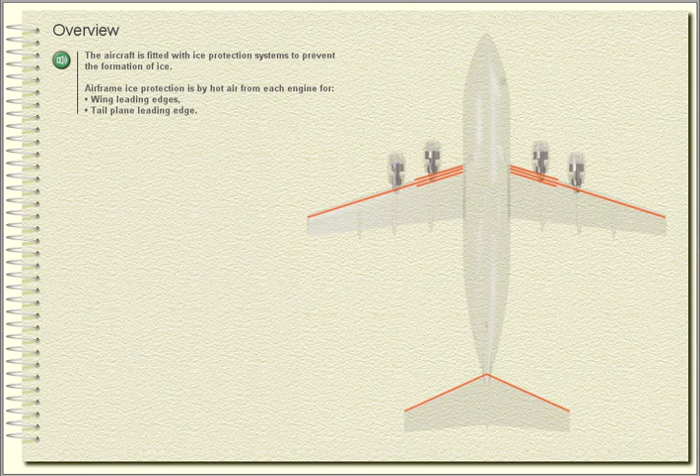Other ice protection is by electrical heating for pitot heads, front static vent plates, Q-feel pitot head, windscreens A and B, and TAT probes.

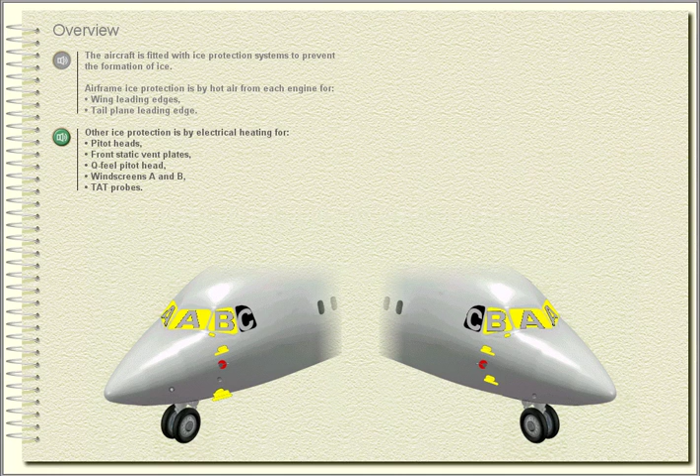Each A windscreen is provided with a 2-speed wiper and a manually operated screen wash.

An ice detector is fitted to warn the crew of ice accretion.

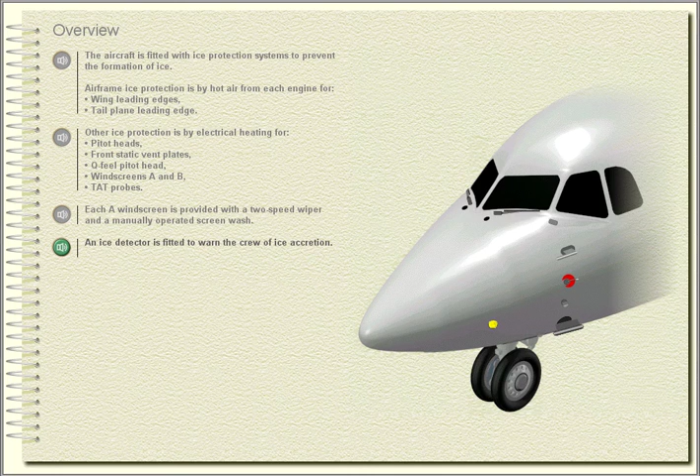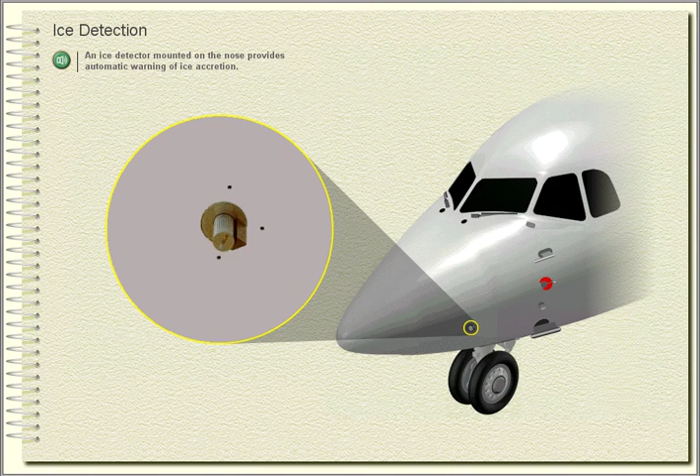Ice detection. An ice detector mounted on the nose provides automatic warning of ice accretion. The ice detector is controlled by the ice detector switch on the ice protection panel.

The switch is normally on and is covered to prevent it being selected off accidentally.

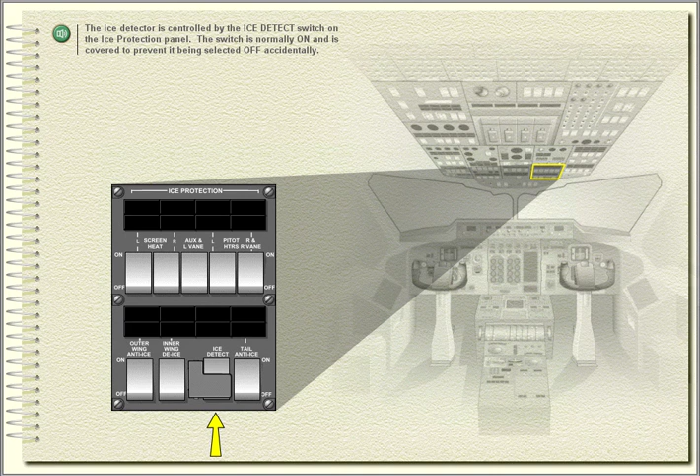The ice detector comprises an AC motor driving a serrated rotor next to a fixed knife-edge cutter.

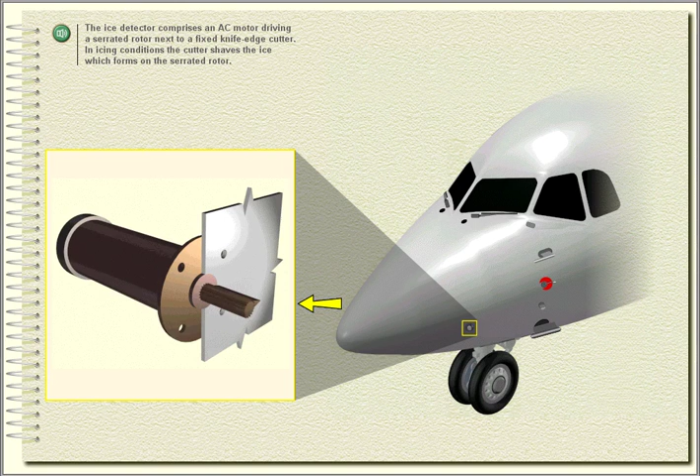In icing conditions, the cutter shaves the ice which forms on the serrated rotor. This action produces a torque reaction in the motor, which illuminates 'Ice detected' on the central warning panel.

The annunciator will remain lit for 60 seconds, or until the aircraft is out of icing conditions.

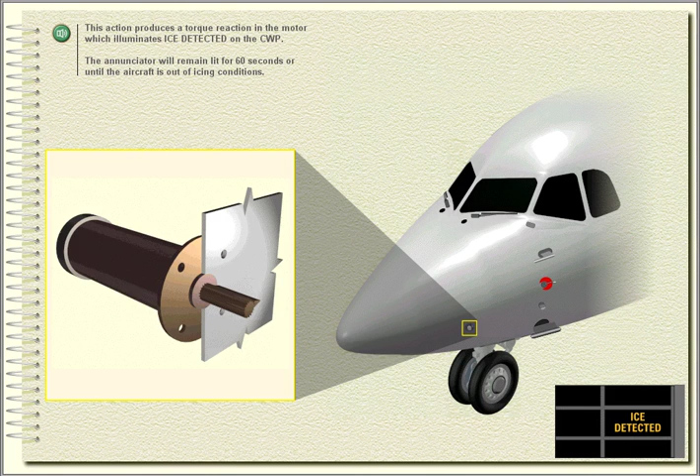Wing ice protection. Wing ice protection is provided by two separate systems: outer wing anti-icing and inner wing de-icing. The complete wing leading edge is anti-iced by hot air, normally supplied from the outer engines 1 and 4.

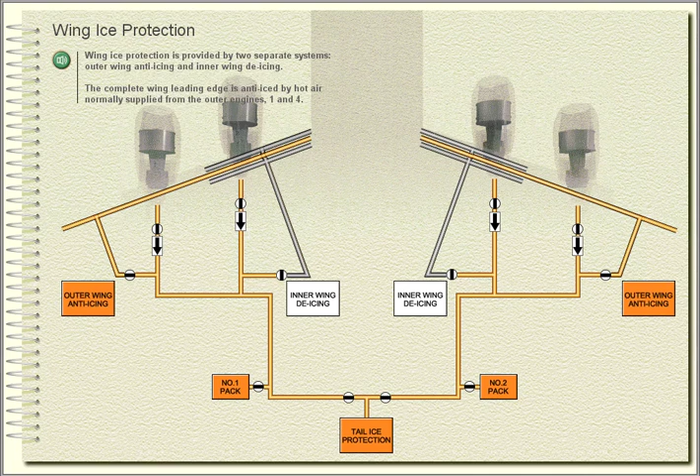Additional ice protection is provided for the inner section of the wing only, which is de-iced by hot air, normally supplied from the inner engines 2 and 3.

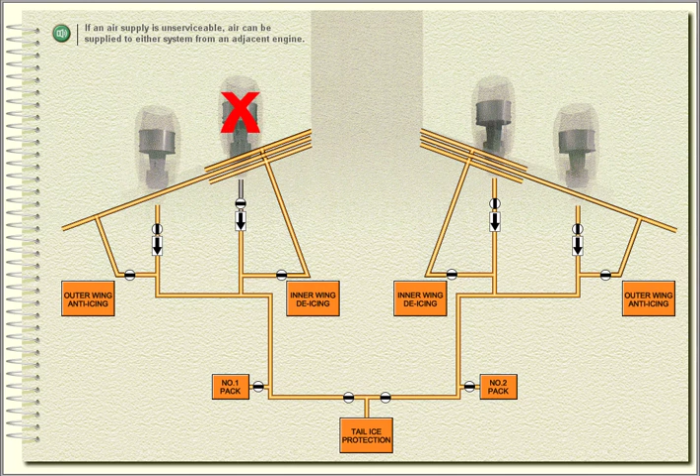If an air supply is unserviceable, air can be supplied to either system from an adjacent engine. Exhaust air is ducted overboard through under-wing vents or at the wingtips across the aileron horn.

Outer wing anti-icing is used whenever ice forms on the airframe to keep the leading edge clear of ice. Inner wing de-icing is used during holding and approach in icing conditions to remove built-up ice from the inner section of the wing.

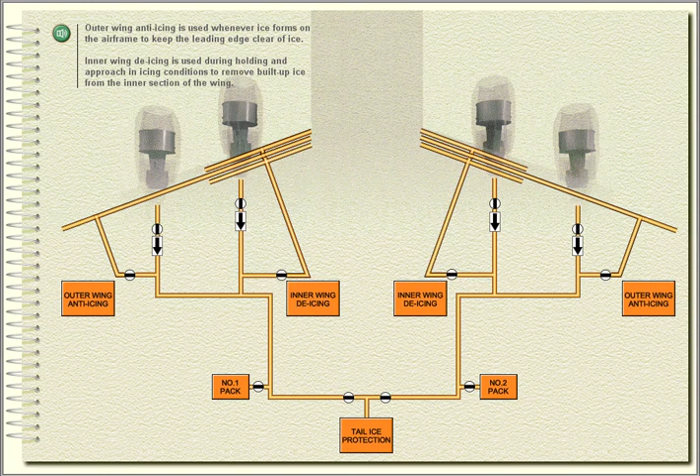Each system has a control switch on the ice protection panel, each one controlling a pair of valves. The valves can only be opened in flight, and each has a not in position selected annunciator.

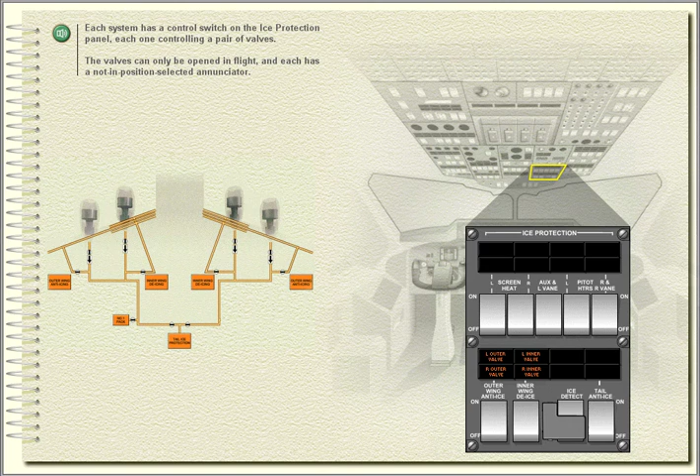Operation of either outer wing anti-icing or inner wing de-icing is confirmed by wing tail anti-ice on.

If an approach is made in icing conditions, inner wing de-icing is used to ensure removal of all ice from the inner wing. If it is not,

wing not de-iced illuminates when flaps are selected to remind the crew that insufficient ice protection is being used.

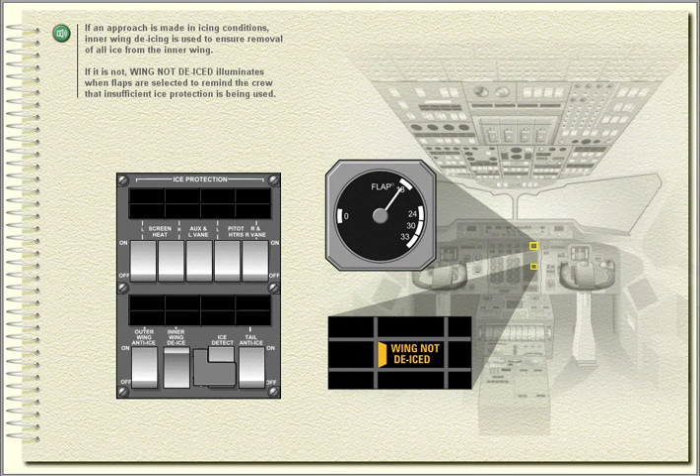If the temperature of an engine air supply is low when outer wing anti-ice or inner wing de-ice are in use, air low temp illuminates. Engine air fault also illuminates to identify which engine air supply is affected.

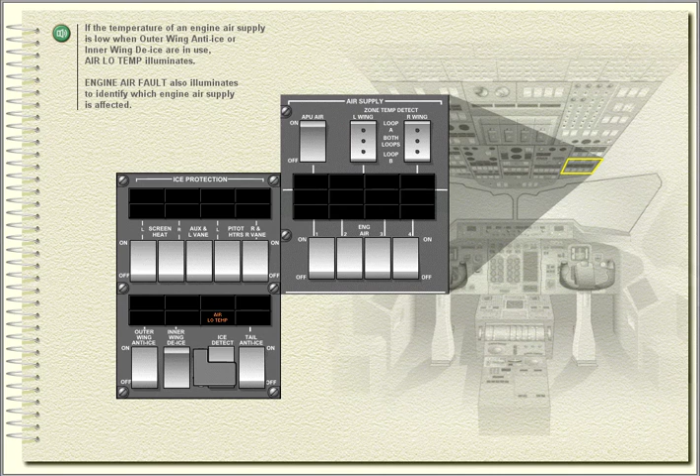Engine air fault will not illuminate if the engine air valve is selected off.

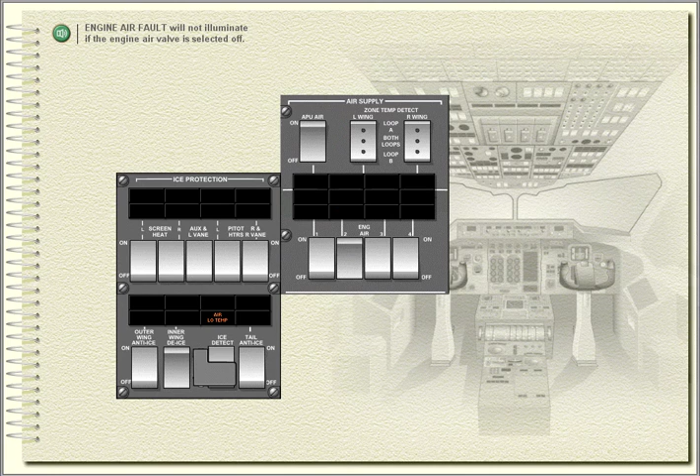Tail ice protection. The leading edge of the tailplane is anti-iced by hot air from the two bleed air ducts at the rear of the spine.

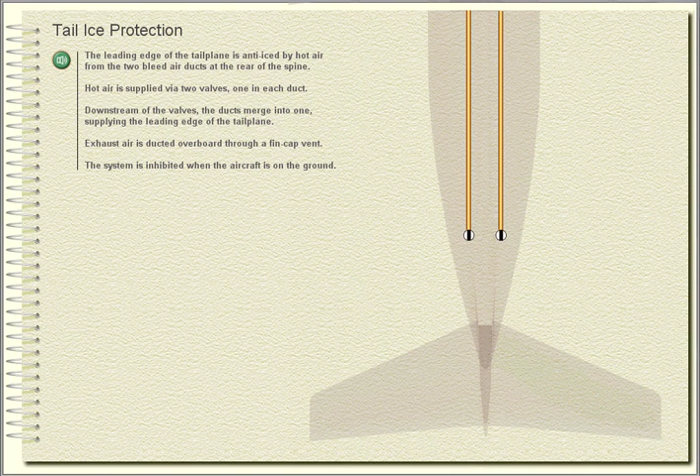Hot air is supplied via two valves, one in each duct. Downstream of the valves, the ducts merge into one, supplying the leading edge of the tailplane.

Exhaust air is ducted overboard through a fin cap vent.

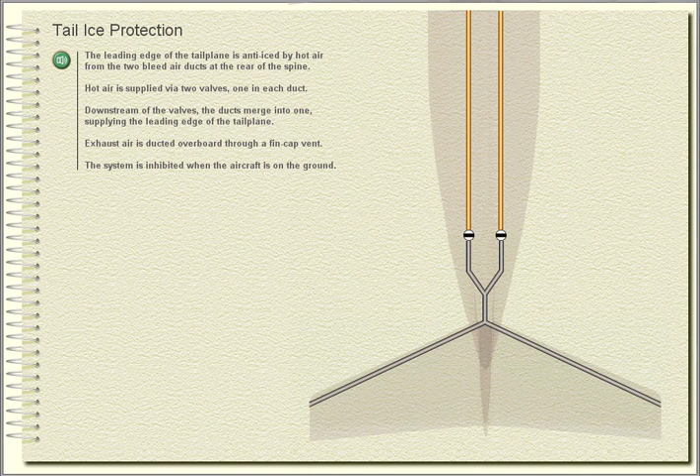The system is inhibited when the aircraft is on the ground. A tail anti-ice switch controls both valves, and each has a not in position selected annunciator.

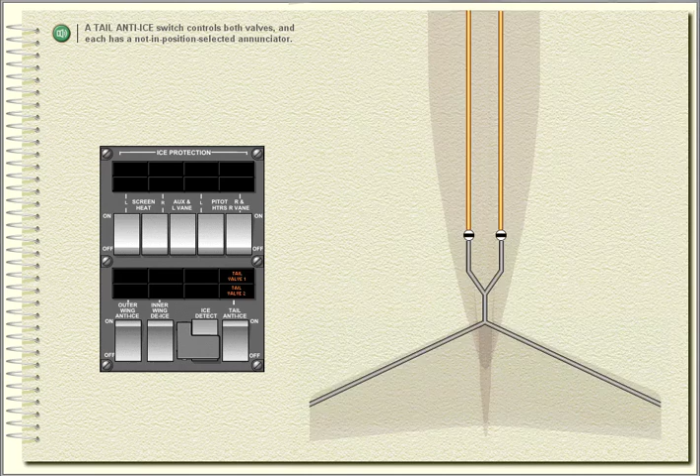Operation of tail anti-icing is confirmed by wing tail anti-ice on. This annunciator confirms the operation of any of the three airframe ice protection systems.

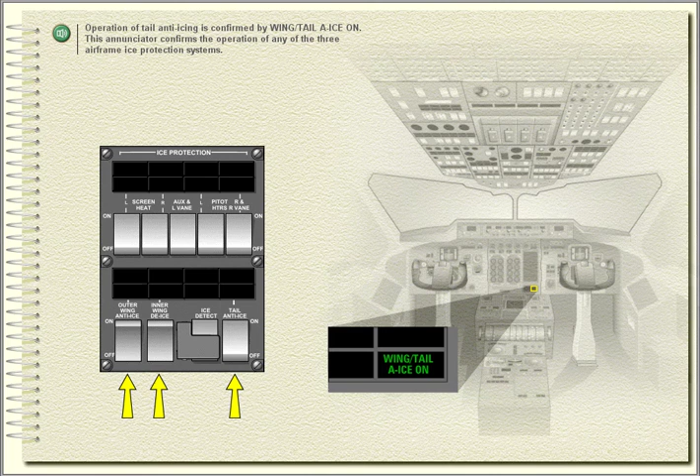Pitot and static heaters. The pitot heads, static plates, TAT probes and airflow sensor vanes are fitted with electrically heated elements to prevent ice formation.

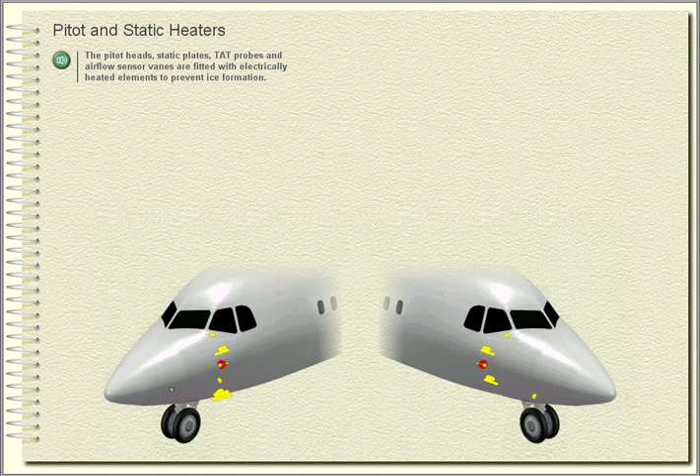There are three pitot heads mounted on the forward fuselage. The captain's on the left-hand side, the first officer's on the right-hand side. An auxiliary pitot head is fitted on the right-hand side just below the first officer's.

A Q-pot pitot static head supplies the control feel system and is mounted on the underside of the forward fuselage.

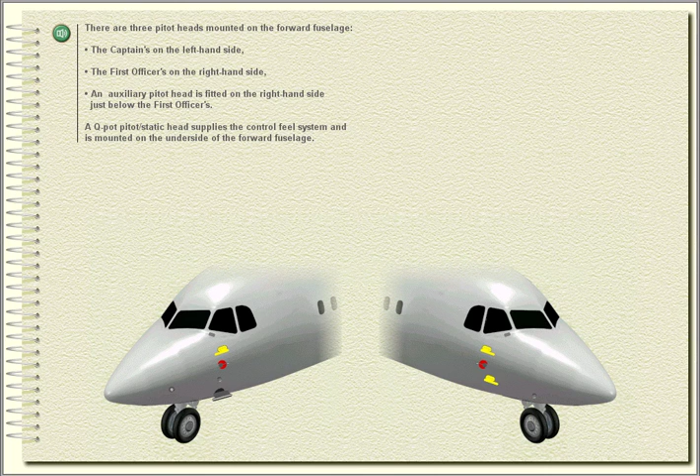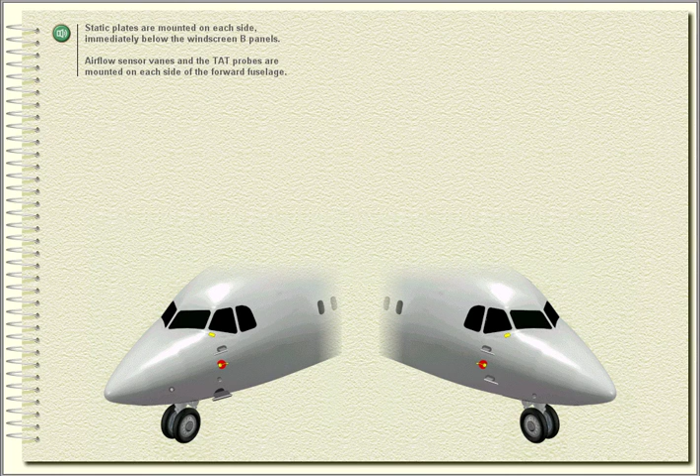Static plates are mounted on each side, immediately below the windscreen B panels. Airflow sensor vanes and the TAT probes are mounted on each side of the forward fuselage.

Three switches, labelled left pitot heaters, right pitot heaters and right vane, and auxiliary and left vane, control power to the pitot heaters and airflow sensor vane heaters.

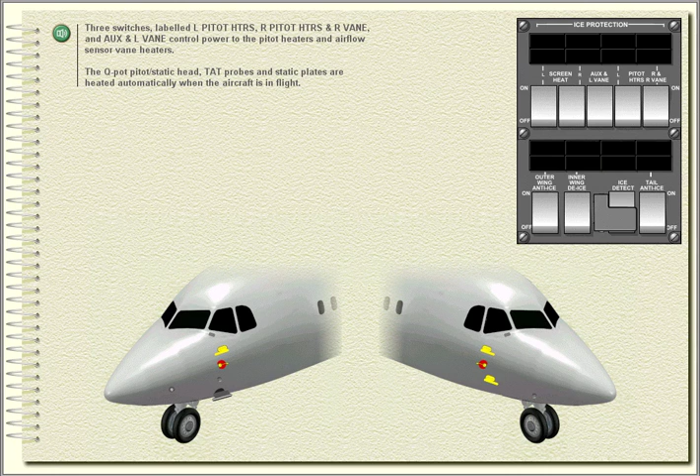The Q-pot pitot static head, TAT probes and static plates are heated automatically when the aircraft is in flight.

Failure of any pitot heater, airflow sensor vane heater or the Q-pot pitot static heater is indicated on the ice protection panel. There is no failure indication for a static plate or TAT probe heater.

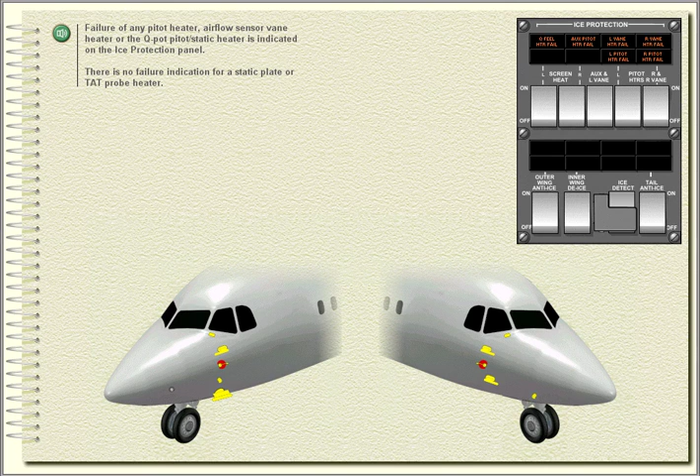Windscreen heating. The A and B windscreen panels are electrically heated to prevent the formation of ice and mist on them, and to improve their resistance to bird strike.

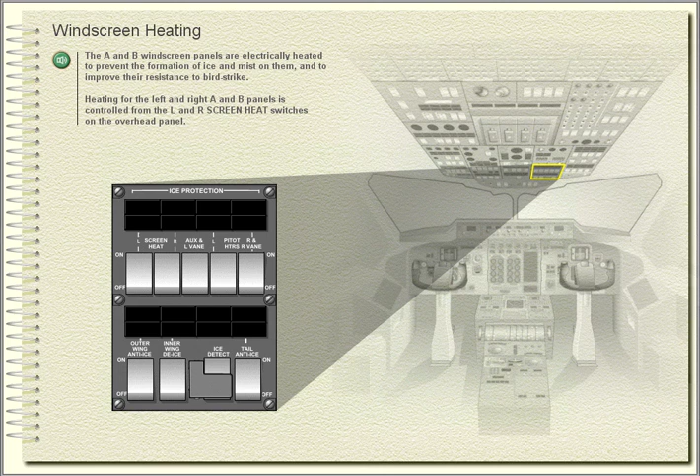Heating for the left and right A and B panels is controlled from the left and right screen heat switches on the overhead panel.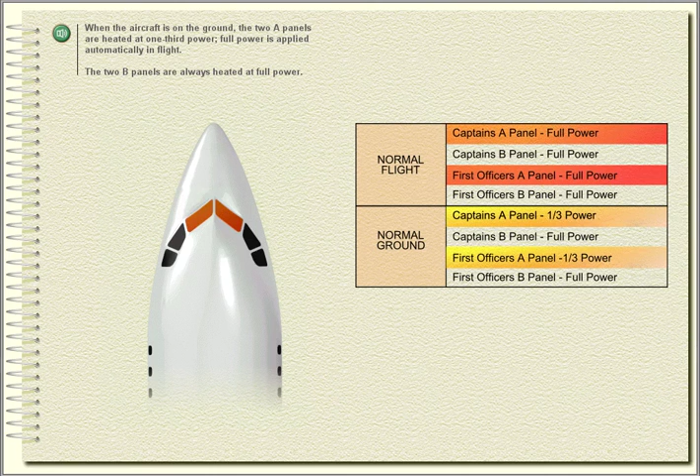When the aircraft is on the ground, the two A panels are heated at 1/3 power. Full power is applied automatically in flight. The two B panels are always heated at full power.

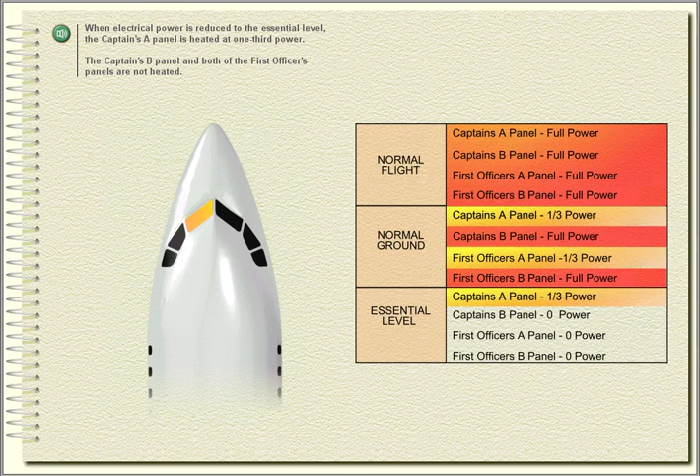When electrical power is reduced to the essential level, the captain's A panel is heated at 1/3 power. The captain's B panel and both of the first officer's panels are not heated.

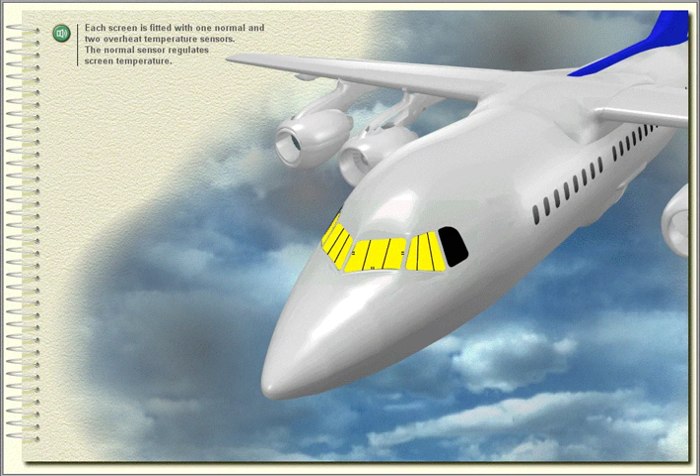Each screen is fitted with one normal and two overheat temperature sensors. The normal sensor regulates screen temperature. If the normal sensor fails, screen temperature rises.

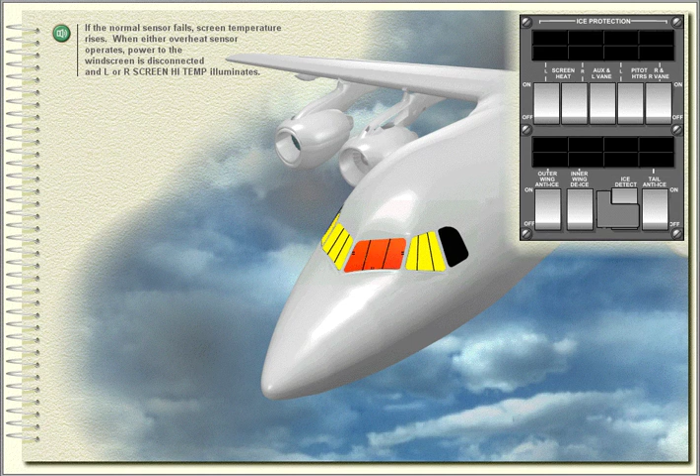When either overheat sensor operates, power to the windscreen is disconnected and left or right screen high temp illuminates. When the panel cools down, the heating supplies are restored to the windscreen panel and its temperature is regulated at a higher level than normal. The fault warnings remain illuminated until reset by cycling the appropriate screen heat switch.

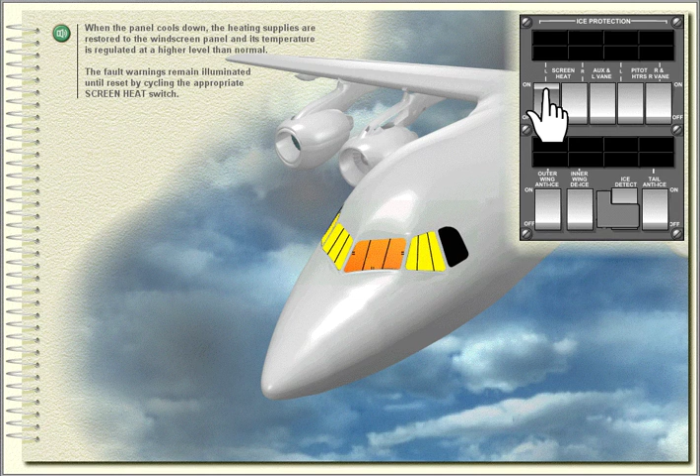If screen heat is not selected on at any time, screen heat selected off illuminates on the central status panel.

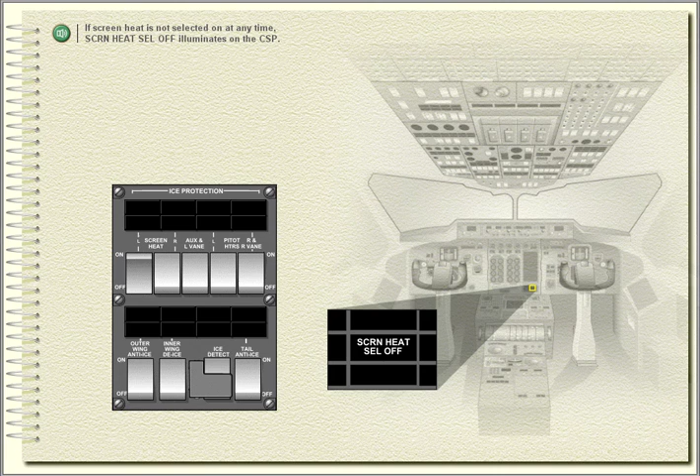Windscreen wipers are fitted to each A panel and have dedicated control switches. The wipers have two operating speeds: fast and slow.

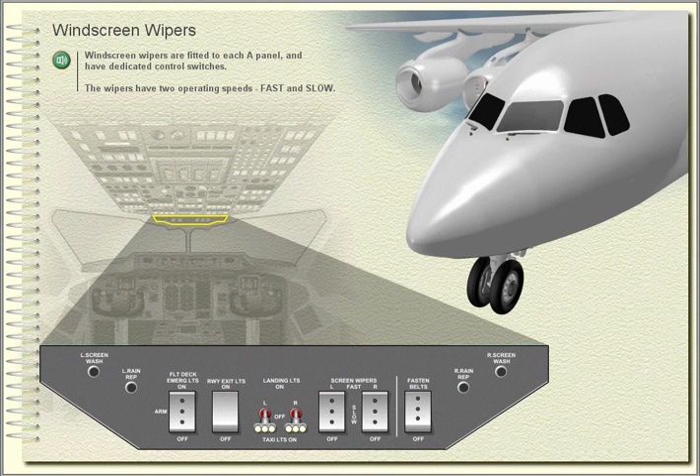Windscreen wash. The external surfaces of the two A windscreen panels can be cleaned using the windscreen wash system. Pressing the left or right screen wash buttons on the overhead panel will direct fluid onto the screens. The fluid is stored in a reservoir in the electrical equipment bay.

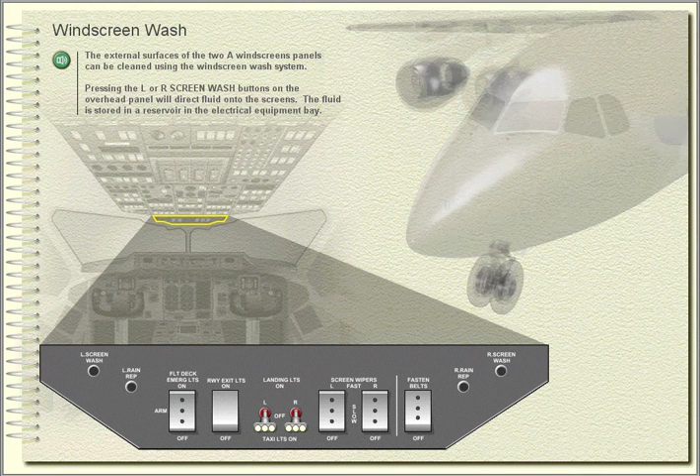Rain repellent. A rain repellent system is fitted to the aircraft, but because of the harmful effects of the fluid, the system is normally disabled.

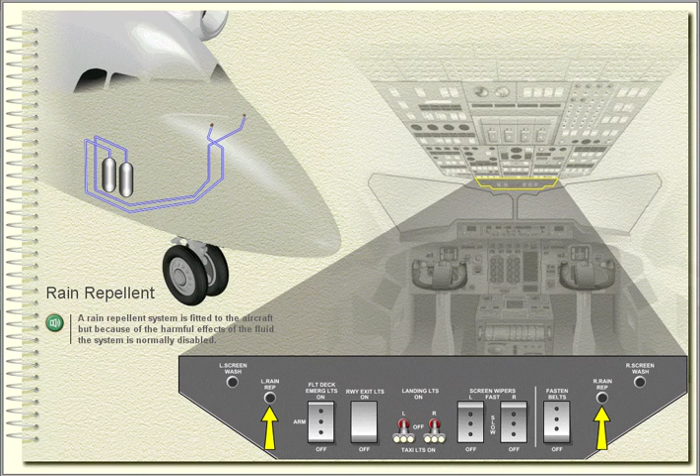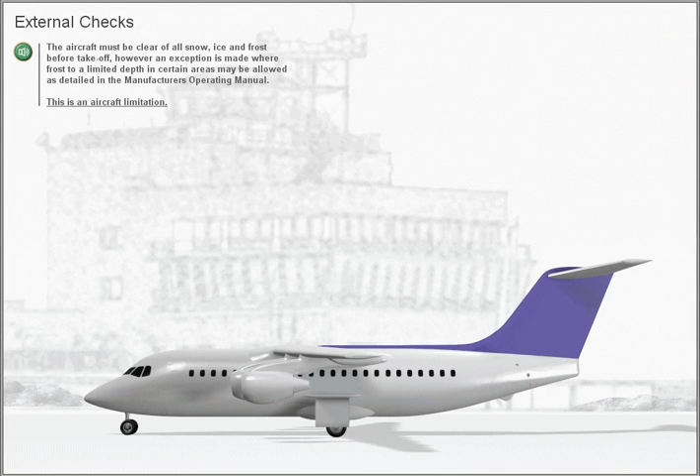External checks. The aircraft must be clear of all snow, ice and frost before takeoff. However, an exception is made where frost to a limited depth in certain areas may be allowed, as detailed in the manufacturer's operating manual. This is an aircraft limitation.

The ice detector cover must be removed and the ice detector inspected for general condition. Before commencing the external checks, the ice detector may be switched on in order to observe rotation of the serrated rotor.

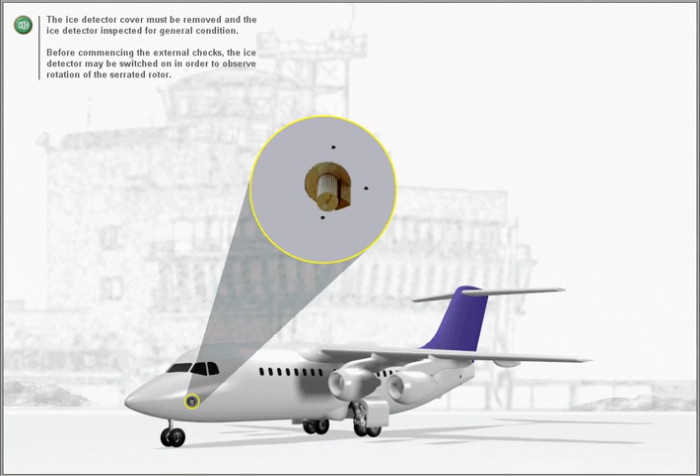The condition of the windscreen wipers and screen wash rain repellent heads must be checked.

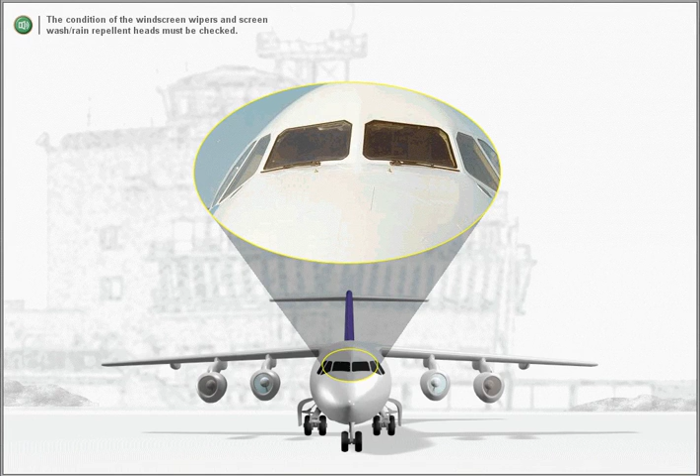Pre-flight. After AC power has been applied to the busbars, the screen heat and pitot and vane heaters must be checked off. This is confirmed by the 5 heater fail captions. The Q-Feel heater fail caption is not lit because power is not supplied to the heater on the ground.

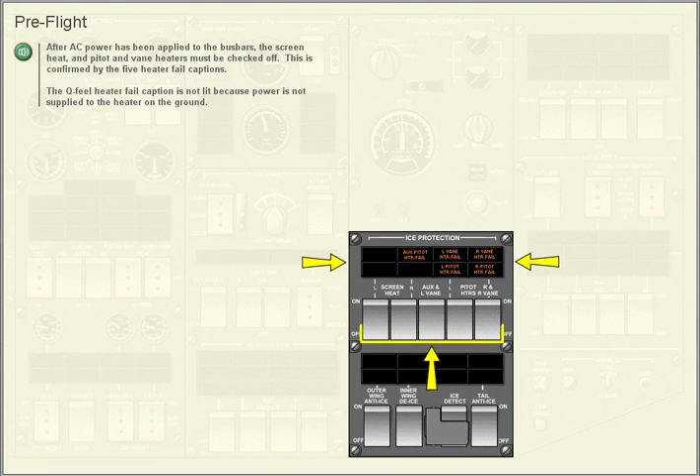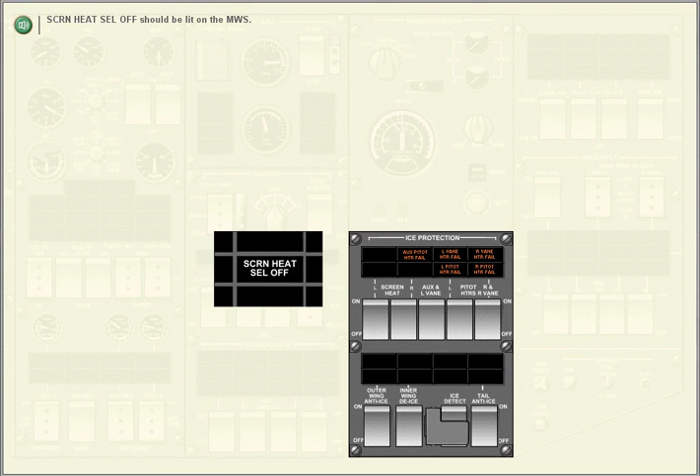Screen heat selected off should be lit on the master warning system. Outer wing anti-ice, inner wing de-ice, tail anti-ice and ice detect should all be checked off. The associated wing and tail ice protection valve indications should all be checked out.

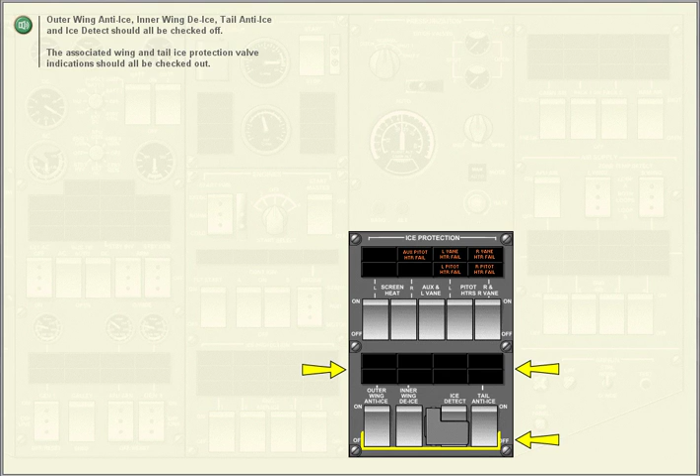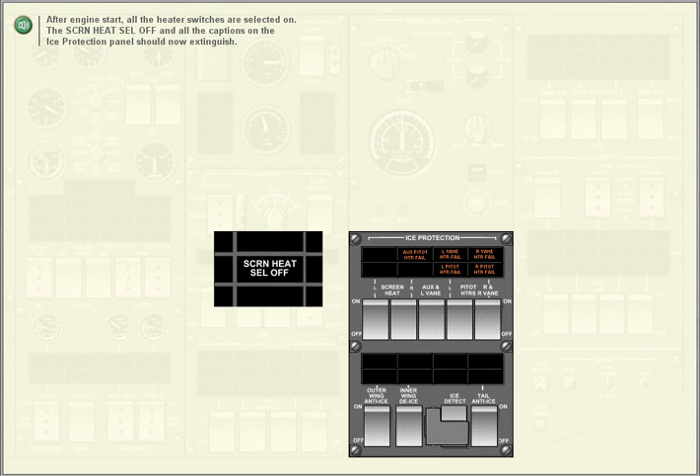Before engine start, the ice detector is selected on. After engine start, all the heater switches are selected on. The screen heat selected off and all the captions on the ice protection panel should now extinguish.

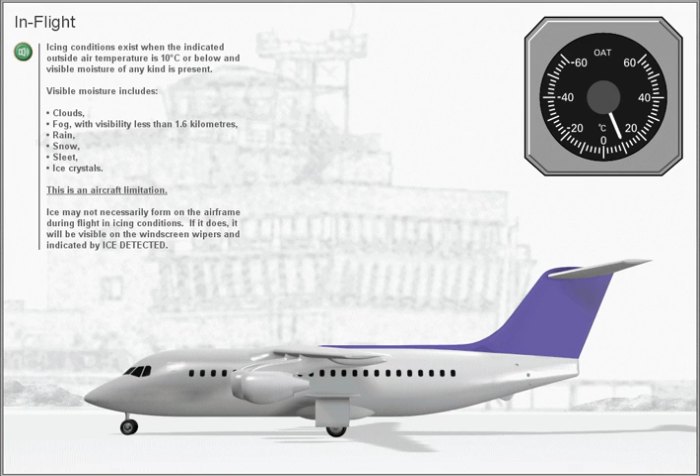In flight. Icing conditions exist when the indicated outside air temperature is 10 degrees Celsius or below, and visible moisture of any kind is present. Visible moisture includes clouds, fog with visibility less than 1.6 kilometers, rain, snow, sleet, ice crystals. This is an aircraft limitation.

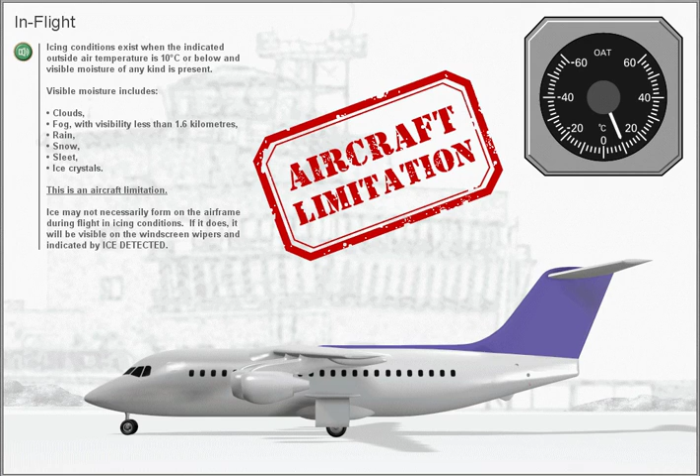Ice may not necessarily form on the airframe during flight in icing conditions. If it does, it will be visible on the windscreen wipers and indicated by ice detected. Tail anti-ice and outer wing anti-ice must be selected on whenever the ice detected warning illuminates or ice is visible on the airframe.

When ice detected extinguishes, inner wing de-ice should be selected on for 1 minute before all airframe anti-ice and de-ice is selected off.

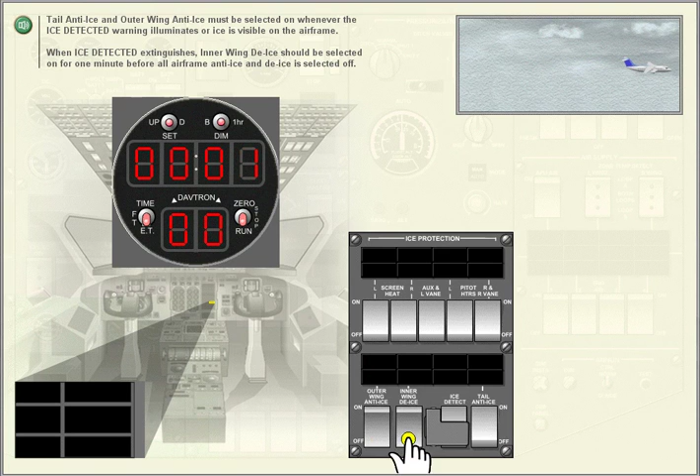If any of the airframe de-ice or anti-ice switches are selected on with a takeoff setting selected on the thrust rating panel, the N1 set on the primary engine display will flash to indicate an illegal bleed setting.

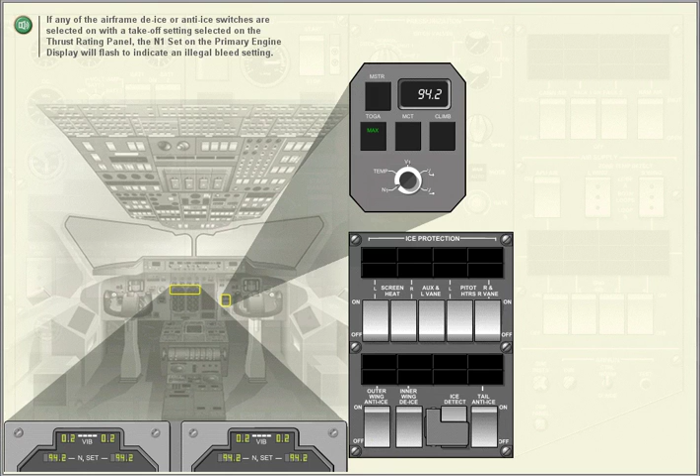If ice forms on the airframe during takeoff, tail anti-ice and outer wing anti-ice may be selected on after the TRP is selected to a climb rating or maximum continuous thrust, MCT.

If the flaps are still extended, wing not de-iced will illuminate until they are retracted.

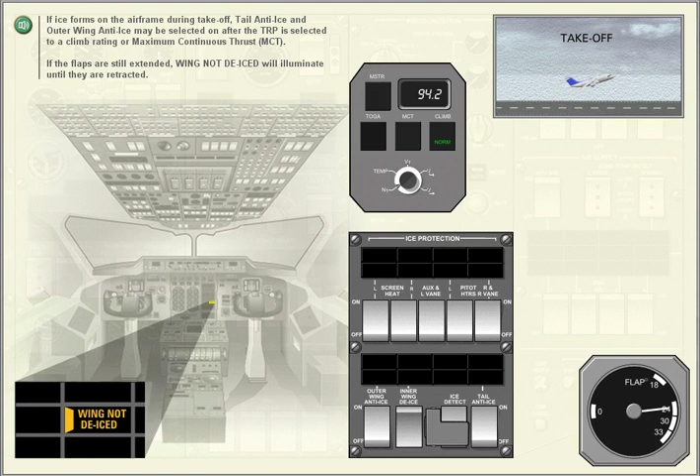During the descent, airframe anti-icing must be selected on whenever icing conditions are encountered, even when ice has not formed on the airframe.

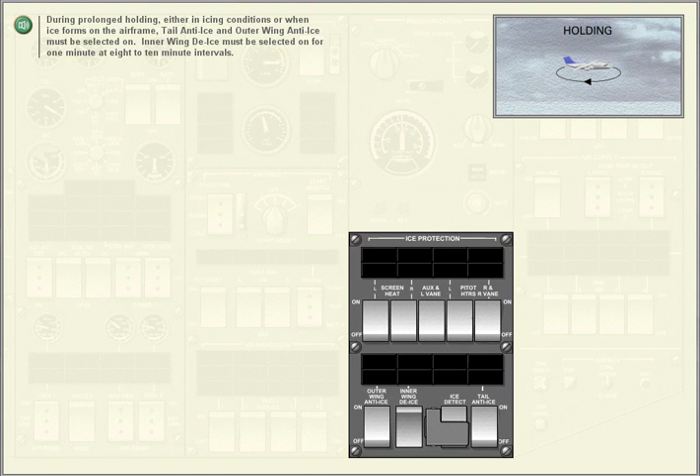During prolonged holding, either in icing conditions or when ice forms on the airframe, tail anti-ice and outer wing anti-ice must be selected on. Inner wing de-ice must be selected on for 1 minute at 8 to 10 minute intervals.

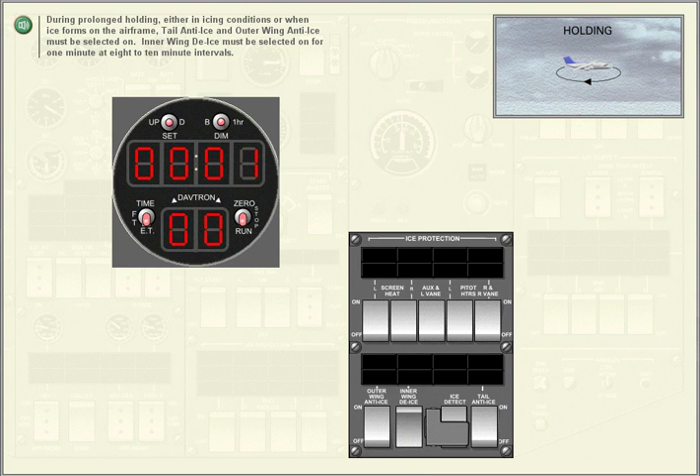If ice forms on the airframe during holding, flaps must not be selected and 7 knots must be added to all speeds. At 200 knots and before selecting flaps, inner wing de-ice must be switched on to prevent wing not de-iced from illuminating unnecessarily.

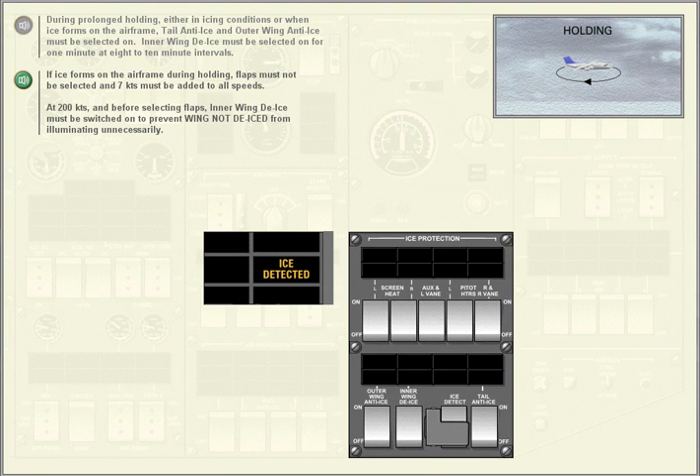Between 500 feet and 200 feet on approach, all airframe anti-ice and de-ice must be selected off. APU air is selected on and all engine air selected off.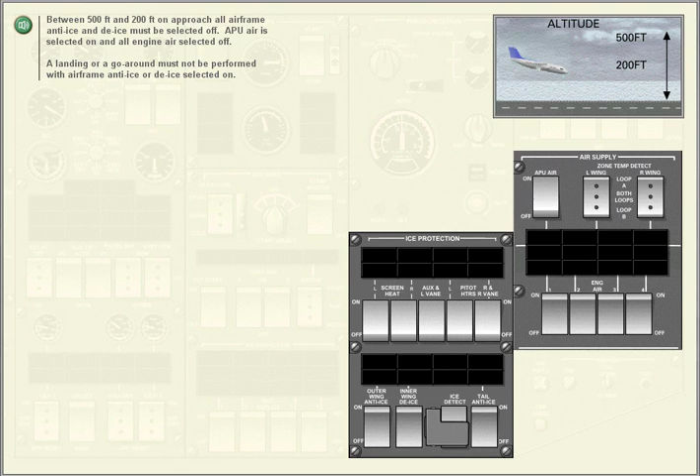A landing or a go-around must not be performed with airframe anti-ice or de-ice selected on. Whenever airframe anti-ice or de-ice is selected on or off, the associated valve nips indications must be monitored for correct operation.

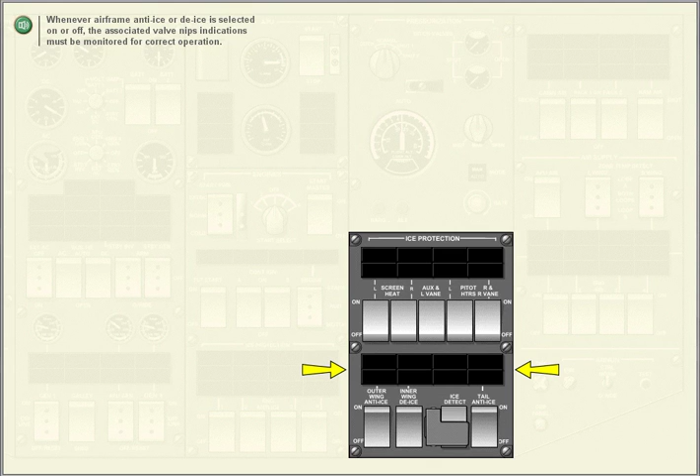After engine shutdown, all heaters on the ice protection panel and the ice detector may be selected off.